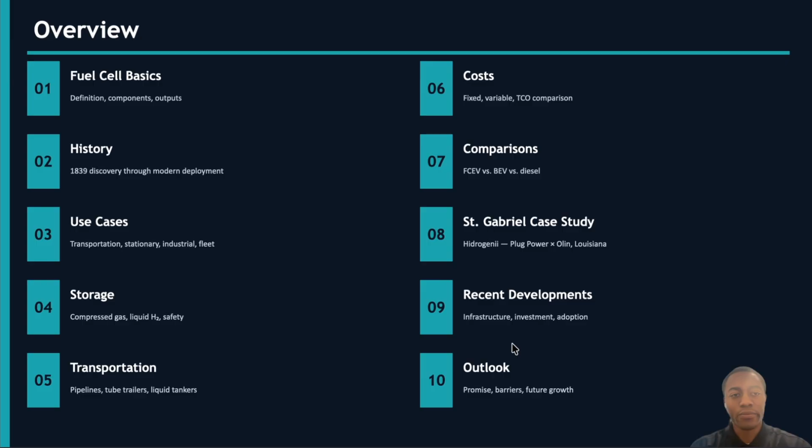I'm Danny Roy Hampton, and today I'll be talking with you guys about the logistics involved with fuel cell technology. All right, so here we have a brief overview of what I'll be talking about. We're going to start with the fuel cell basics.

Before I begin to explain what a fuel cell is, I have to explain how the hydrogen is obtained in the first place. Hydrogen is not normally found out in nature by itself. So in order to get pure hydrogen, you usually have to put water through a process called electrolysis. So essentially, how this works is that you get an electrolyzer. They use electrical energy to split the water into pure hydrogen and oxygen.

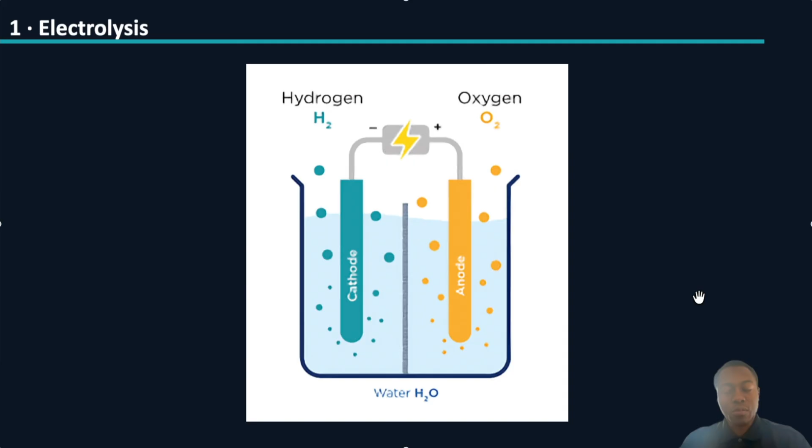So if this electricity comes from a low carbon source like this, the result is often called clean or green hydrogen. So when I'm talking about the fuel cell and its logistical costs, I'm mainly talking about the use of green hydrogen.

All right, so here I have a diagram of a fuel cell. A fuel cell essentially is an electrochemical device. It has three components: the anode, the polymer electrolyte membrane, which is in the middle here, this red line, and the cathode. There are no moving parts at the core of it. The only things that do move are the hydrogen gas that flows through, the electricity, and the byproducts.

So how the process goes is that the hydrogen gas flows in through this anode, where there's a catalyst, usually made of platinum. That platinum catalyst rips apart the hydrogen into a proton as well as an electron. The protons are able to take a shortcut and go straight through the electrolyte membrane to the cathode side, while the electrons have to take the long way via this external circuit. So as they're traveling through, they're generating electricity. That's how energy is formed from this process.

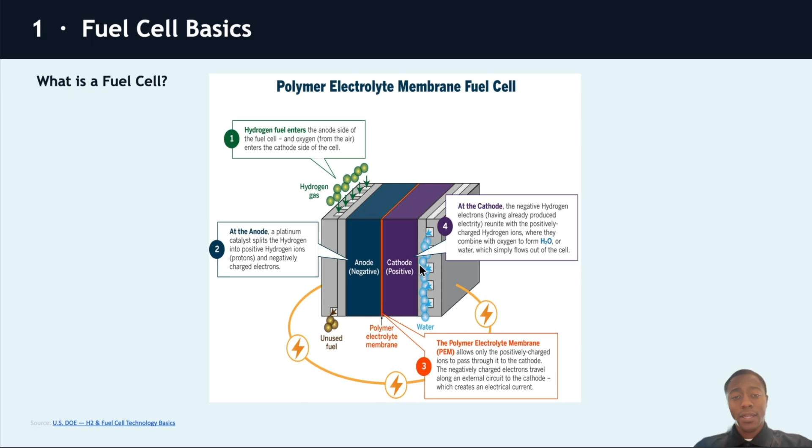So when they make it over to the cathode side, there's oxygen in this chamber. So the proton and electron come back together and form hydrogen. Hydrogen combines with oxygen, and the byproduct of that is water. Another byproduct is heat, and like I said earlier, electricity is generated through this external circuit.

All right, so in this slide, I'm just going to give you a brief history of the fuel cell and its use throughout time. So it's credited to Sir William Grove. In 1839, he demonstrated the first gas battery that utilizes fuel cell tech. It gained major importance in the 1960s through NASA's use of it in their Gemini and Apollo missions. Also in the 1990s, Chicago made use of hydrogen fuel cell buses in prototype transportation systems.

In the 2000s, a company known as Plug Power scaled development utilizing forklifts. Walmart and Amazon actually began using this type of tech around that time. In 2020 onwards, you can see now that the infrastructure has grown majorly since then. You can see it in fleet trucks, trains, general infrastructure for data centers, and the like.

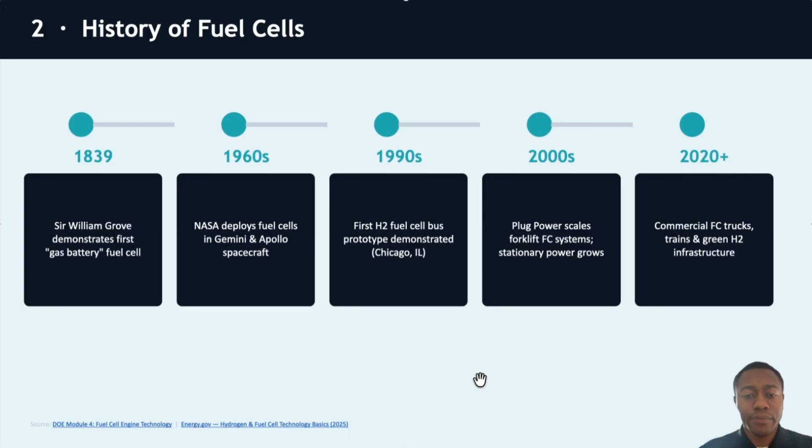So here I just want to go over some use cases. I already touched on it a bit, but a number of these are dealing with transportation and fleet utilization. So here we have the 2026 Toyota Mirai. This is Toyota's latest fuel cell vehicle that's out on the market. We also have the XCIENT fuel cell truck made by Hyundai. Like I said earlier, Walmart is utilizing fuel cell technology to power their forklifts in warehouse settings.

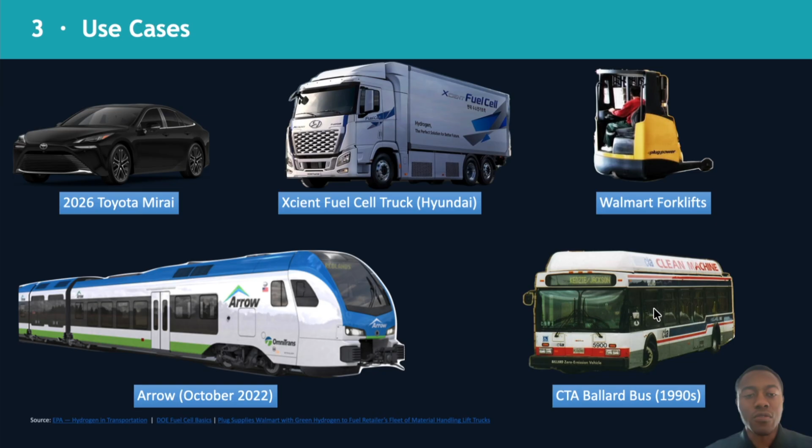And we have this example here. California actually began using a fuel cell powered train to transport people. And then here's that example from the last slide, the bus that the Chicago Transit Authority used as a test for their hydrogen fuel cell fleet. And this is one of the, I would say, major use cases today that fuel cell technology has been used for. It's being rapidly adopted and used for data centers to meet the growing power demand that these types of facilities require.

Okay, so in the next few slides, I will be going over the logistics side of the house, starting with the storage. So, hydrogen storage is one of the most constraining steps in fuel cell systems. This slide is highlighting the two main forms of storage with hydrogen. So, you can either store it as a compressed gas, or store it as liquid hydrogen. The gas is usually compressed to about 350 to 700 bar, while liquid hydrogen has to be stored at very cold temperatures so it can remain liquid, negative 253 degrees Celsius or negative 423 degrees Fahrenheit.

So the compressed gas is common in vehicle applications, while the liquid hydrogen becomes more attractive for high volume transport via fleet vehicles because it stores more hydrogen in less space. Each method, however, like with everything, carries trade-offs in equipment costs, energy demand, and the complexity of the operations.

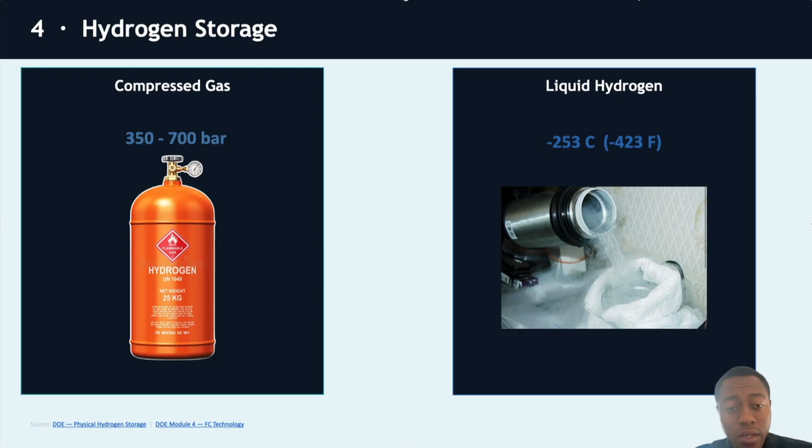So I just have this slide here to emphasize that safety is also a core part of hydrogen transport or storage. Hydrogen must be carefully managed because it is a small molecule, it can leak easily, and is often handled under high pressure or cryogenic conditions. It's also very flammable, extremely flammable.

So safe storage always depends on either strong tank design, leak detection because it is an odorless gas as well, proper ventilation. You need pressure relief systems, and most importantly, proper training because without proper training, none of the things I mentioned earlier really matters.

All right, so in this slide, I just wanted to address the three main modes of hydrogen transportation and delivery. So those are the pipelines, we have tube trailers and also liquid tankers. So I wanted to note also that the United States has about 1,600 miles of hydrogen pipeline, and that these pipelines generally provide the lowest delivered cost per kilogram at scale, since once the infrastructure is laid in place, there isn't any need for loading up a vehicle or hiring a driver and things of that nature.

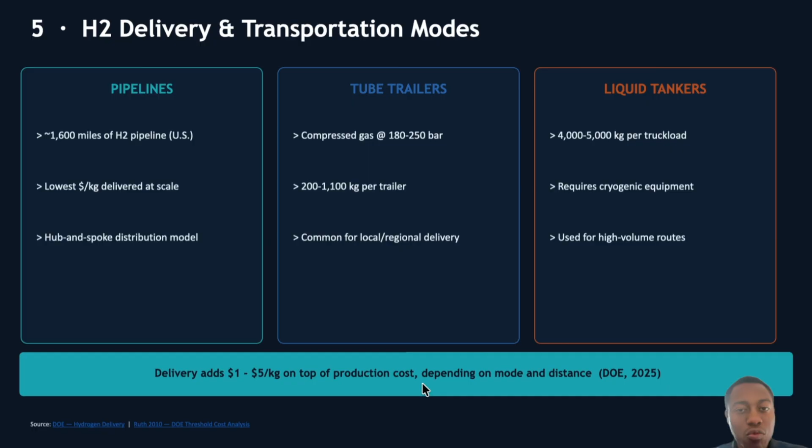So one of the most important takeaways here is that the delivery can add about $1 to $5 per kilogram on top of production costs. So having these numbers make sure everything is squared away with the delivery method and the equipment is key to ensuring that you get the most out of what you're spending to transport and deliver this resource.

In this slide, I'm just giving more of a comparison on the efficiency of fuel cells versus battery electric vehicles and diesel and gasoline vehicles. So fuel cell vehicles tend to have about a 60% electrical efficiency. Battery electric vehicles are sitting around 90%. Gasoline have about a 20 to 40% thermal efficiency. So, as you can see, battery electric vehicles still have an advantage against fuel cell electric vehicles, about a 30% gap there.

Moving on to the tailpipe emissions, obviously fuel cells and battery electric vehicles will win in that regard against diesel and gasoline. The only byproducts, as I said earlier, for fuel cell vehicles are water and a bit of heat, along with the electricity generated. So going on to the refuel and recharge section, fuel cells actually beat out battery electric vehicles, taking around 15 minutes or less to refuel, while the battery electric vehicle has to take a lot longer. Diesel and gasoline, obviously, it only takes a few minutes at the pump, 5 to 10 minutes on average for those larger fleet vehicles or big rigs.

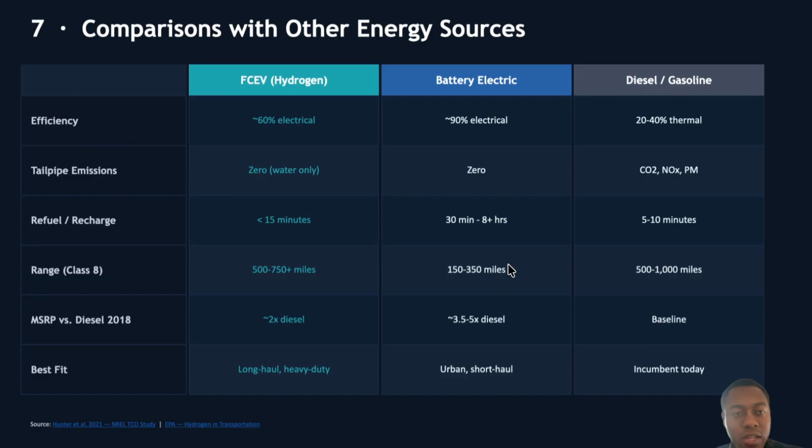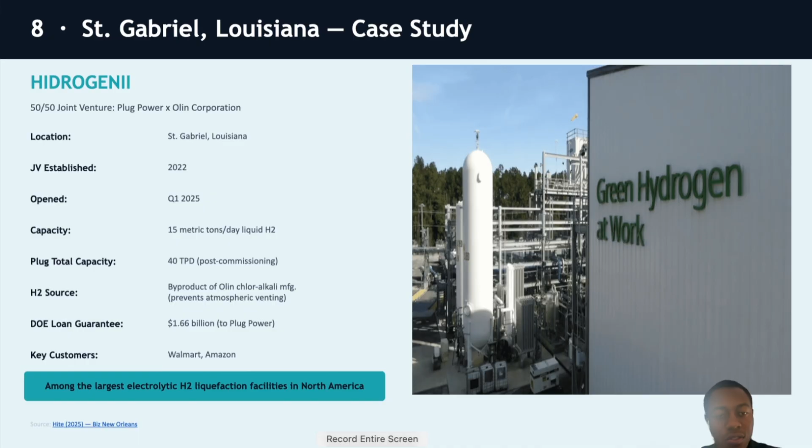Just a quick note before I get to the next few slides, I did want to make a note. So the hydrogen fuel cells by themselves, they don't produce enough energy.

They have to be put together in a series, usually known as stacks, to be able to produce enough energy or generate enough power for operations.

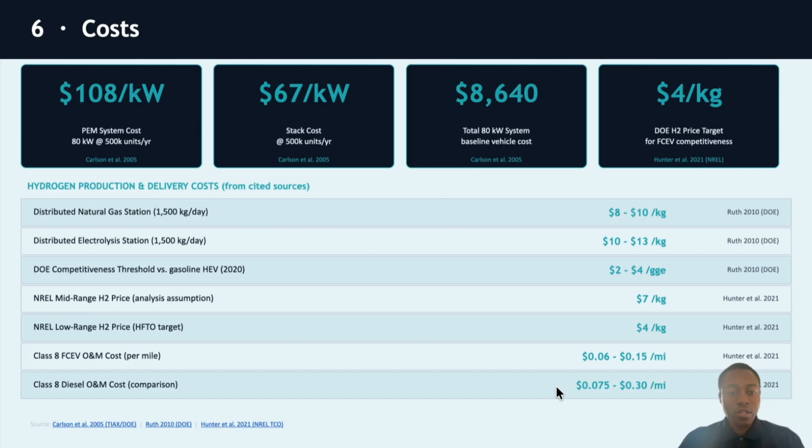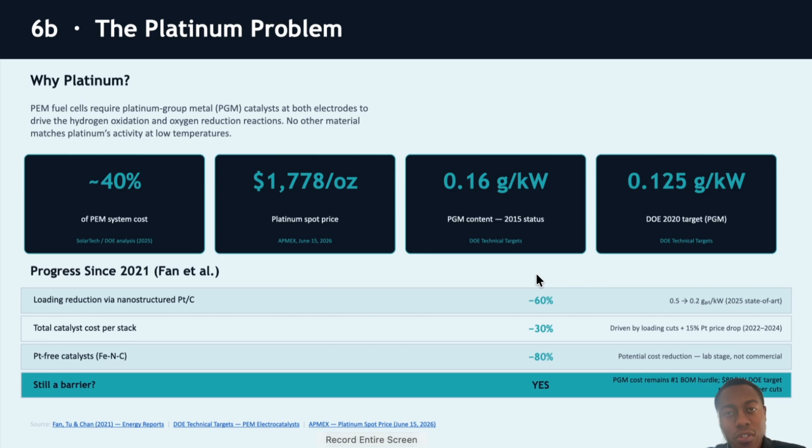So they're showing progress in reducing catalyst loading, including reductions from about 0.5 to 0.2 grams of platinum per kilowatt. But still, even with that improvement, it still remains the leading bill of materials used in the production of hydrogen fuel cells.

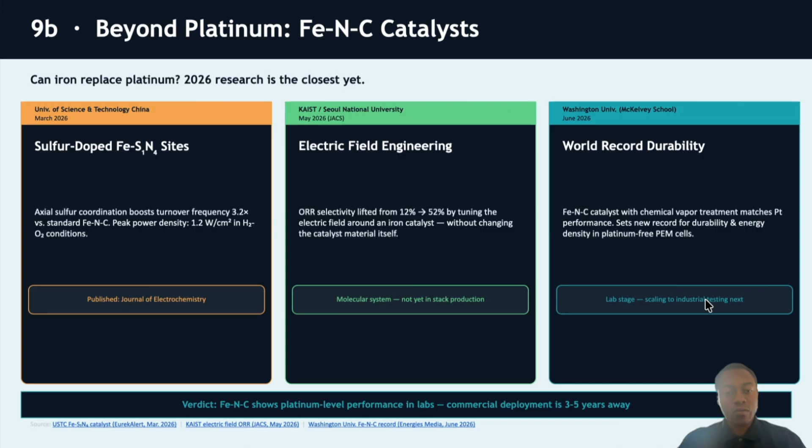And here I have my list of references.